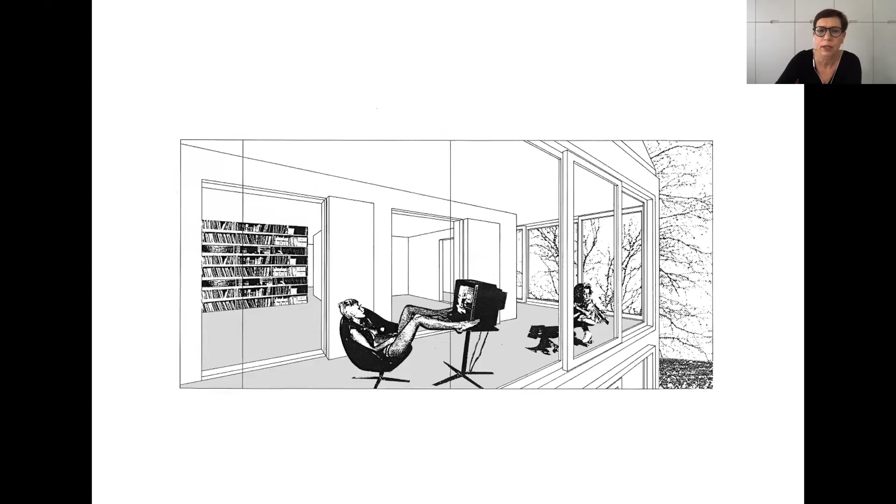This is a photograph from the exhibition, because when the house was realized, it was exhibited, it was furnished, and then it was a kind of open house for 3 months, because this construction company wanted to invite people to be interested in the house and to buy it. You can see the corridor with some people, so you can see how it can be used as a space for social interaction.

These images come from a catalog. We had an exhibition in Hamburg and another one in Paris, and we printed a catalog. What you can see here is that when we were thinking about this house, which didn't really have a plot in the competition brief, it was not only the construction firm, but also a very popular magazine involved, and it was a kind of media project in a way. These two launched the competition.

So when we were looking for an appropriate approach to this task, we were also thinking about having this house in different environments. These are very early Photoshop collages, you can see it here.

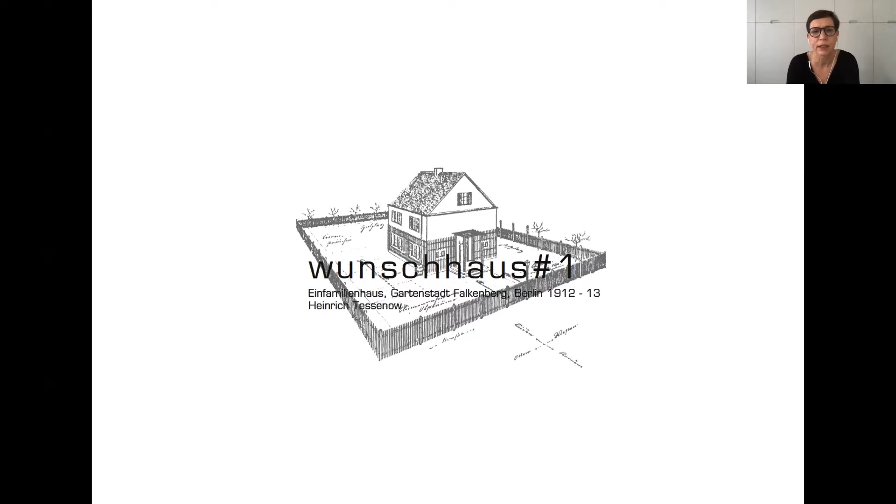And this is a reference project we were extremely interested in, because it served for us as a kind of prototype. It's the house Falkenberg by Heinrich Tessenow. Many years later, we visited the area. It's an urban development and houses by Bruno Taut, but in the middle of this modernist, beautiful modernist Siedlung from the 1920s, you will find the house by Heinrich Tessenow.

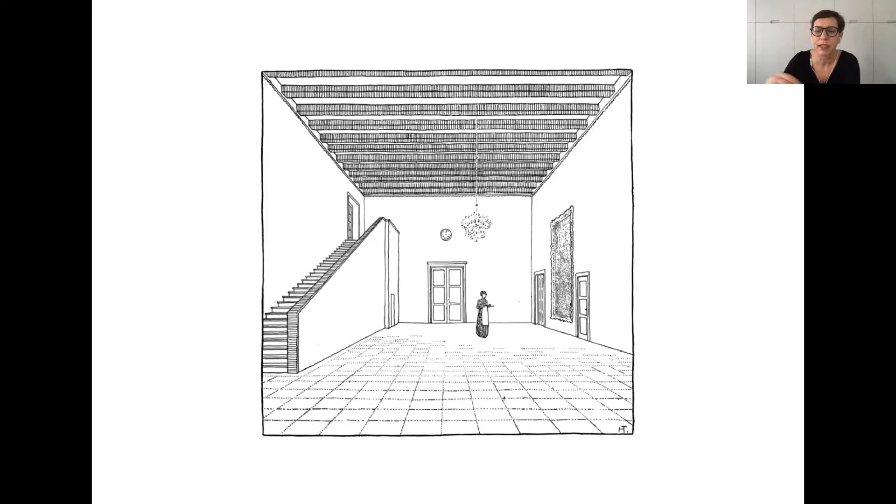And I will share some beautiful drawings with you, because I think they really talk to us about the idea of home. They are by Tessenow. I will not comment on them, but this one is interesting. I will comment on it because he was very much interested in the relationship between the interior and the exterior, and I find this drawing especially beautiful.

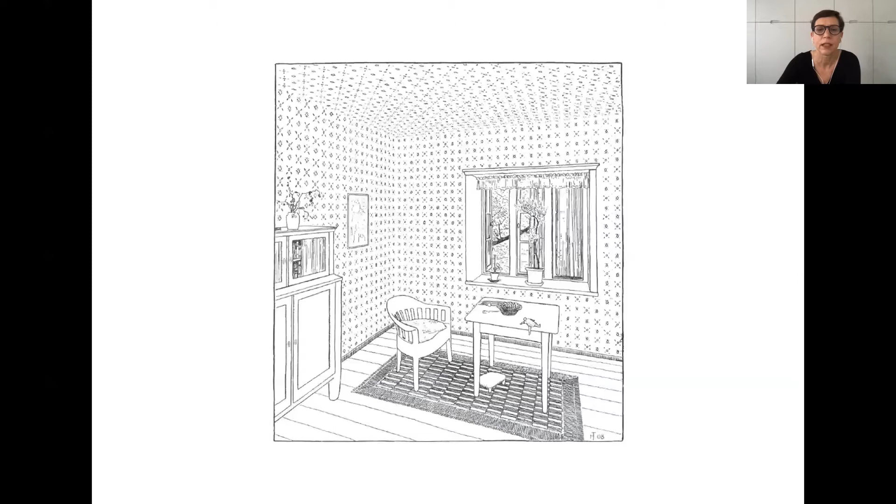And this one also. And this interior room. And he also included in this series of drawings the idea of work. And as we are all working at home at the moment, I find this an interesting image for us to think about.

Another reference was the Haus am Horn in Weimar. It was built by students under Georg Muche from the Bauhaus in Weimar, that's where I teach. This is the floor plan, and you can see that there's a kind of large living room in the center, and all the functional rooms, I would say, are positioned around this central living room. And I think it's a really interesting floor plan.

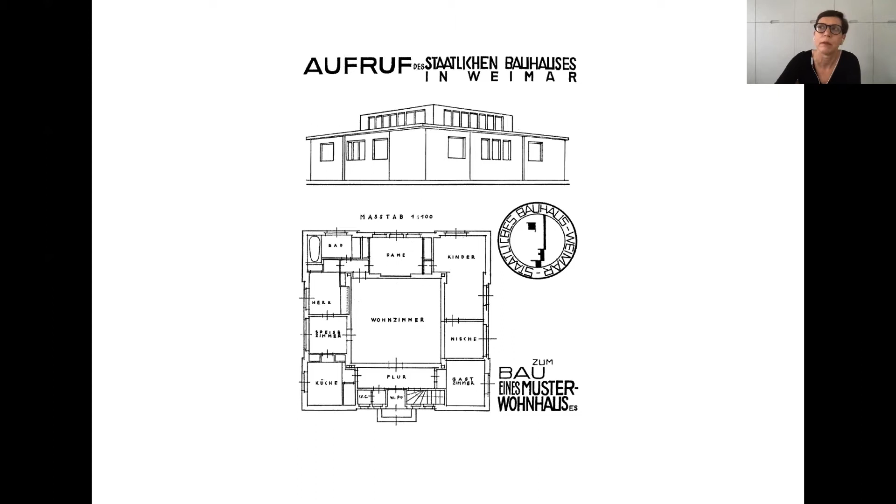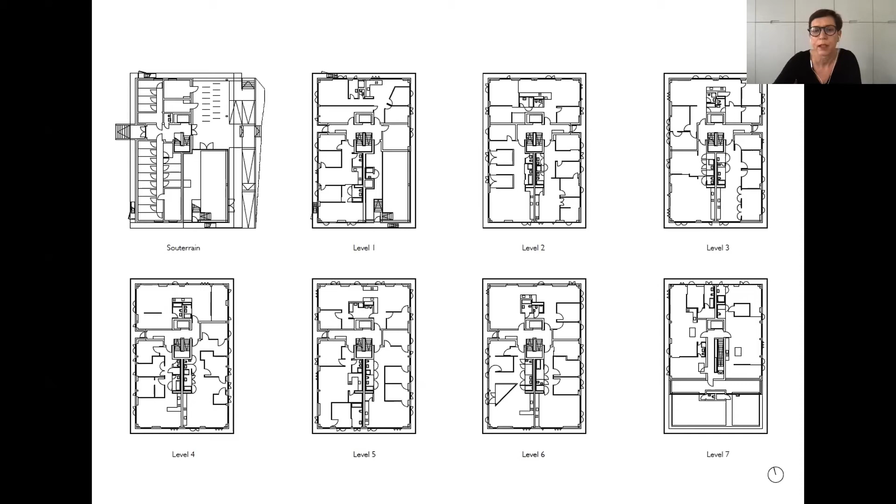This is how the building is embedded within an open plan development from the late 1950s, post-war housing development, when the density was lowered to 50% in West Berlin. This is also why the Senate of Berlin thought it could be re-densified.

But as you can see here, the building site is quite complex. There's a block building to the right, to the east, from the 1990s, when we were trying to reconstruct the historical city. To the left, you can see one of the buildings that doesn't follow the street but follows the open plan approach. Our building is somehow in between those two structures.

It used to be a circulation area, so in the zoning plan it was not meant to be a plot for building a new house. That's why the Senate of Berlin decided to have concept-based bidding for Baugruppen, and that's how we won this competition, and the group was able to purchase the plot.

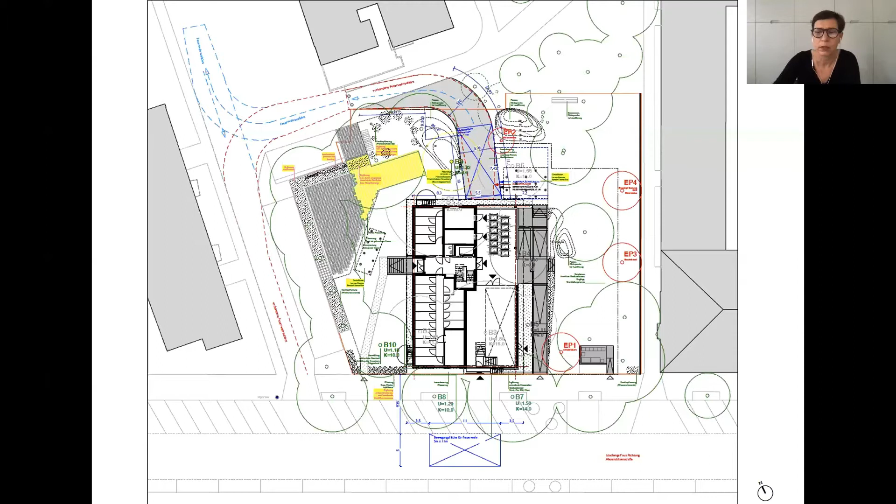I will show you some images by Andrew Alberts, a photographer who was our partner. I work with Tim Heide, and we founded our office together with Andrew Alberts in 1996, but he left in 2008 to become a photographer. We still work very closely together, and most of the images you'll see are taken by Andrew—I'll let you know when images are taken by another photographer.

I would say the concept worked with a kind of shift from nice surfaces to a certain flexibility in the floor plans, and we'll see it later.

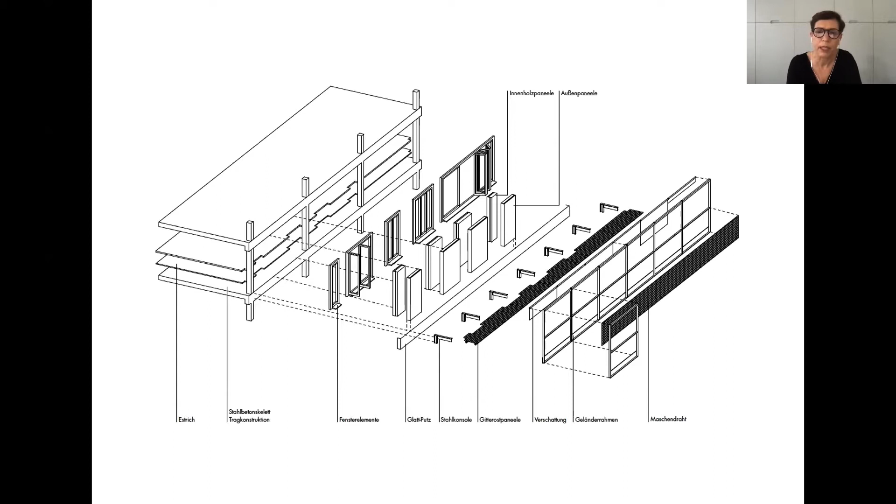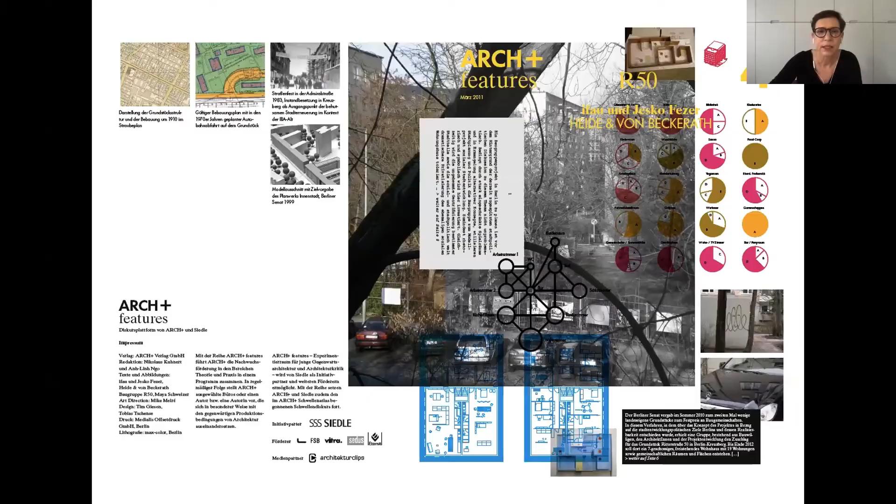And there's another topic. The project was published many times, and this publication is from 2011. So it was made during the planning process. And it's interesting because there are some diagrams I would like to share with you. For example, they were done in the beginning of the planning process, and they are based on interviews with the future residents about their needs and wishes and the relationships between rooms they have and would wish to use.

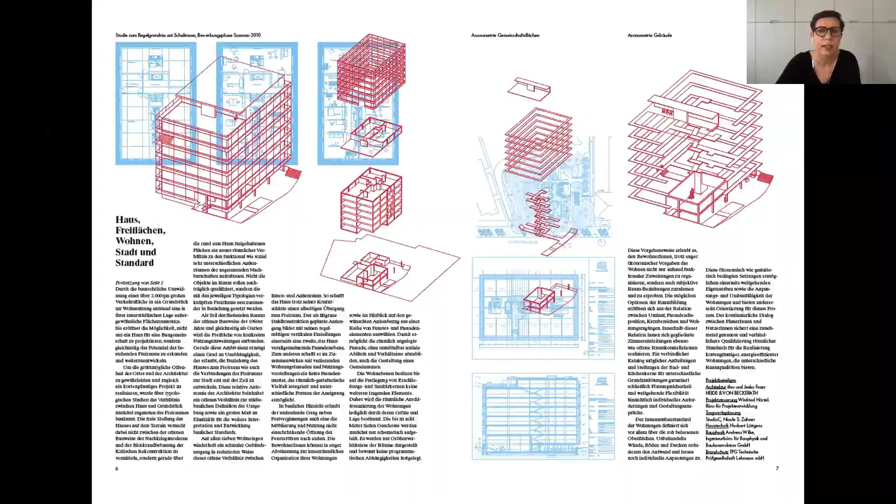And an overview over the different architectural parts of the building. And here's another series of diagrams where the idea and the location and the uses for shared spaces were discussed, and they are represented here.

So in the beginning, we as the architect provided the floor plans with shared spaces on each level. So the idea was that, for example, three apartments would have a shared library or a shared room for their children, and so on. During the discussion with the group, it came out that the best solution would be to have one larger community space, the one that you saw already, and that all the different functions they wished to have would somehow be embedded into the program of this community space.

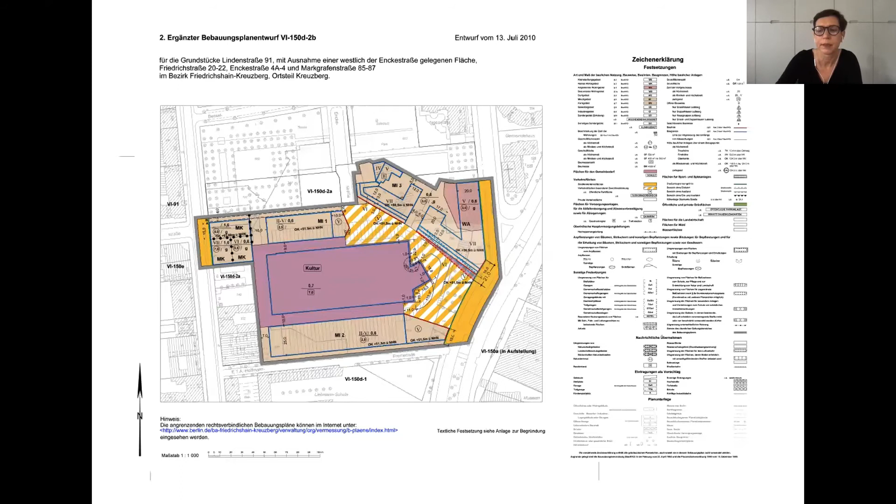Our approach was to have a kind of mix of different users, of owners, people who rent, but also a little bit of commercial space, a social association, local initiatives and services, and creative enterprises.

We developed this volume for the plot, which is somehow the maximum volume. And we knew that the whole design process, and all the discussions we would have, would be related to density, because if you develop a building like this with a width of 23 meters, you have to think about how people live together in such a dense environment.

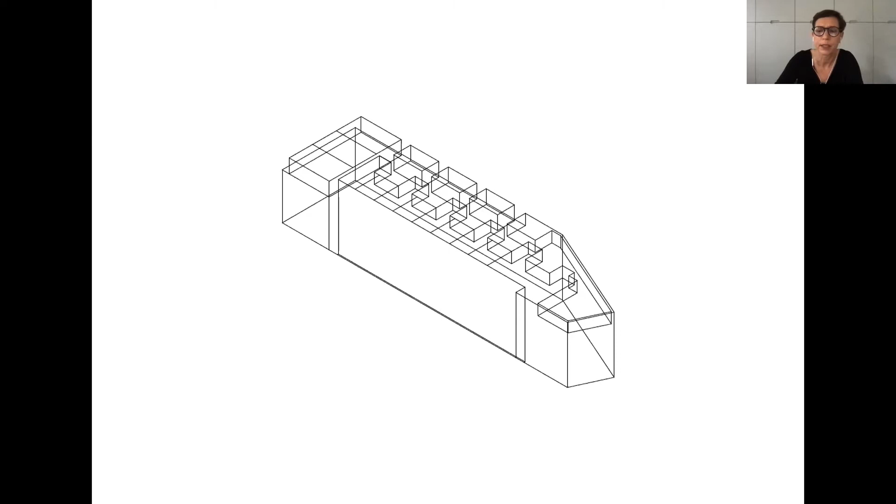What we then did is we tried to have a very economic circulation system. This is based on 2 vertical cores and several streets outside of the building, but also inside of the building. You will find 2 linear circulation streets on the ground floor outside of the building, then one in the middle of the building in the interior, and another one on the roof.

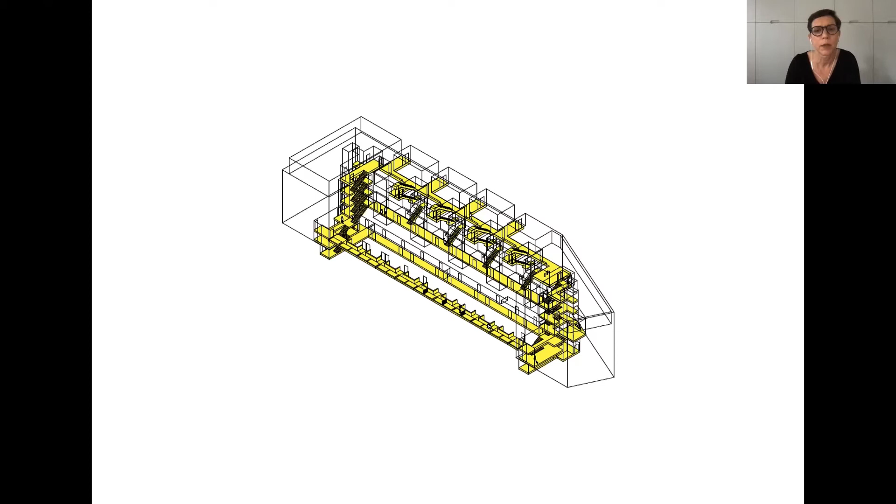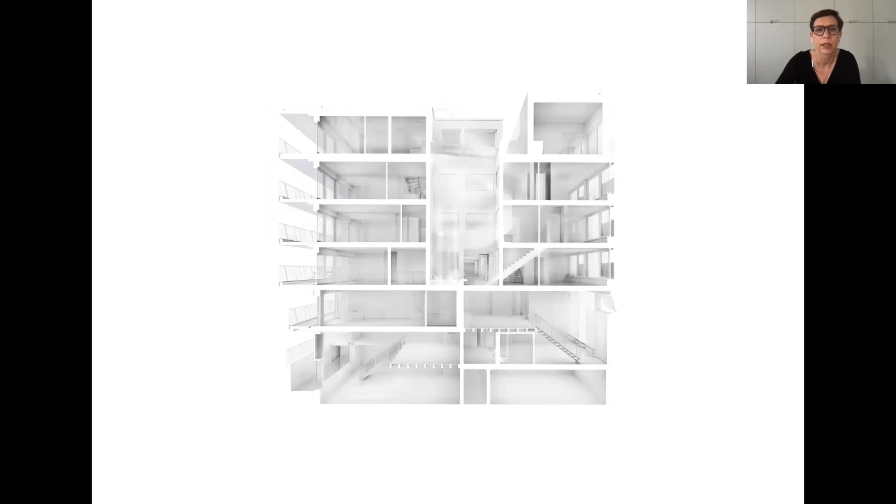This approach to circulation allowed for many different kinds of apartments and studio space, and I will click through this series quickly. It's only to give you an idea of smaller, larger, duplex, and so on, kinds of units.

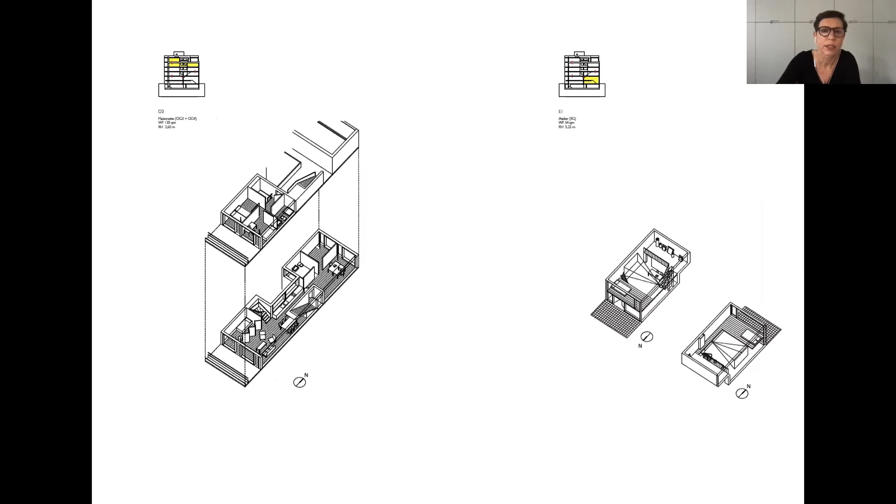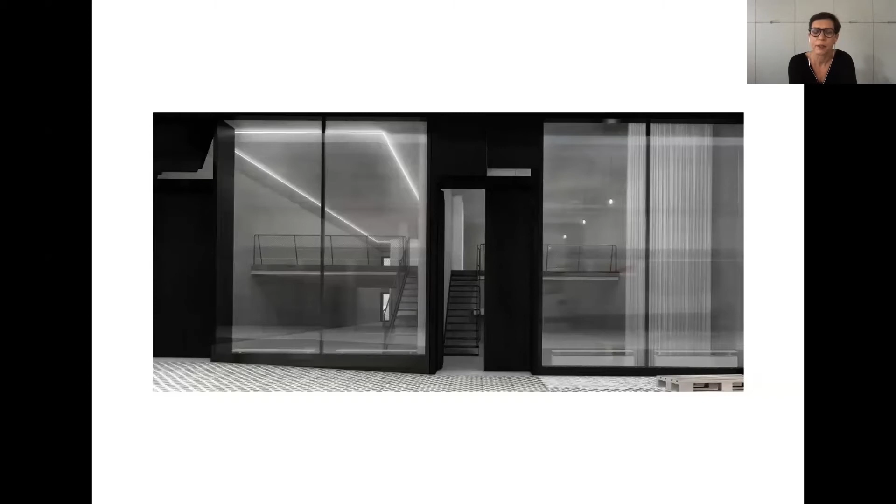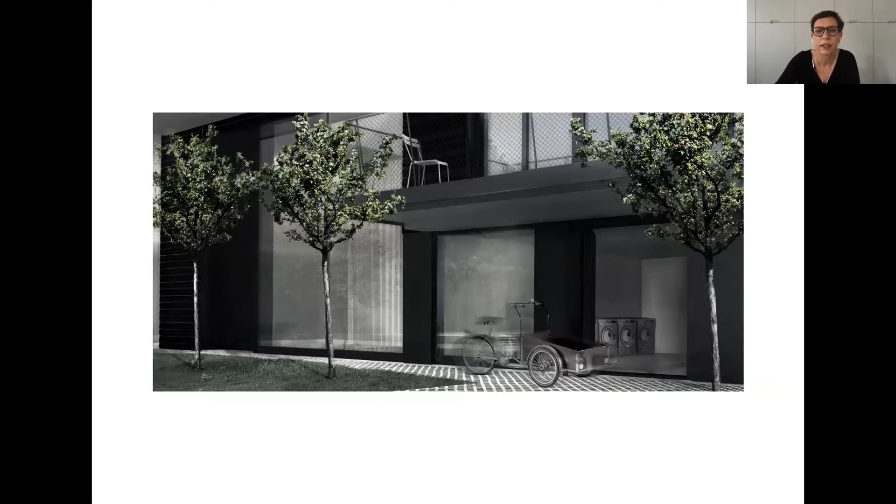One of the problems with a large group, there are almost 90 units in this building, was how to communicate the architectural agenda to such a large group. At one point we realized that classical visualizations of the whole building would not serve us to understand what this huge building would look like, because we were much more interested in the details of openings and galleries and railings.

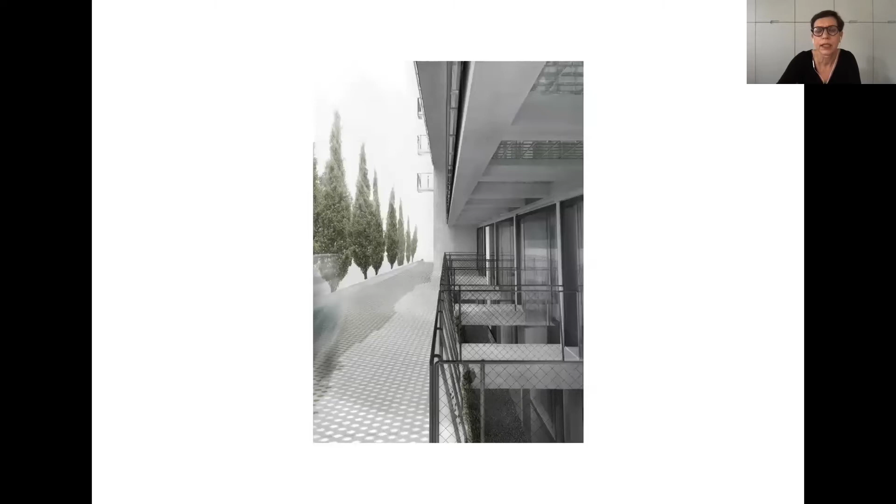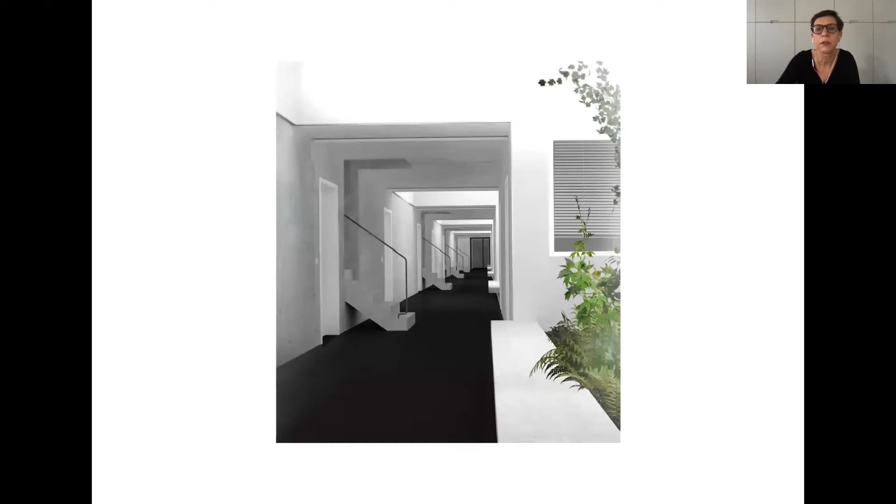I will guide you through this series of sketch-like images that are focused on certain spatial details. This is the entrance hall. This is the access road to the south, where you have little bridges to the double height studio spaces in the souterrain, and the gallery above with glass bricks, and the rue intérieure with the green courtyards. This is how we imagine the courtyards to be.

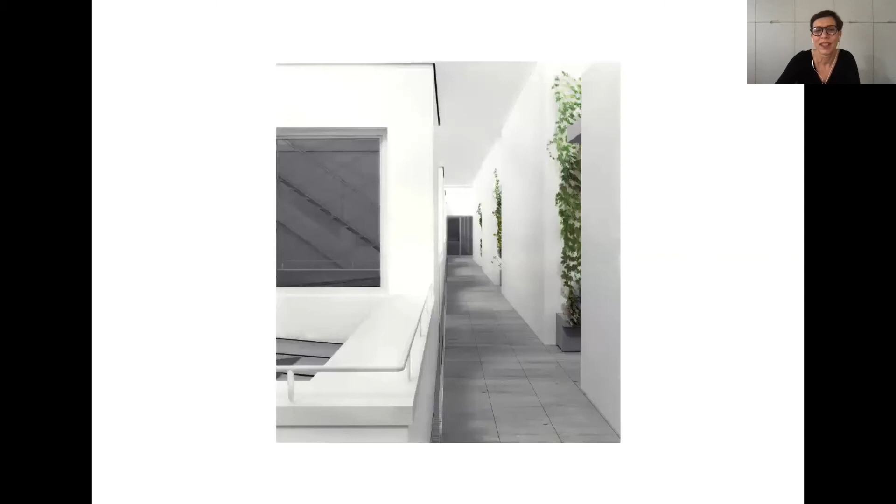The street on the roof, a roof garden. And I will now, as Djordje asked me to, show you some floor plans. I will guide you through the building via the floor plans, starting with the roof plan.

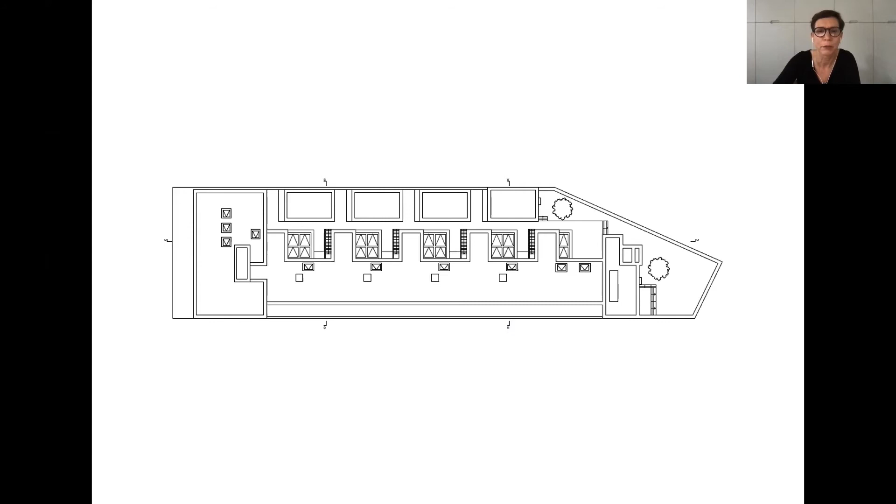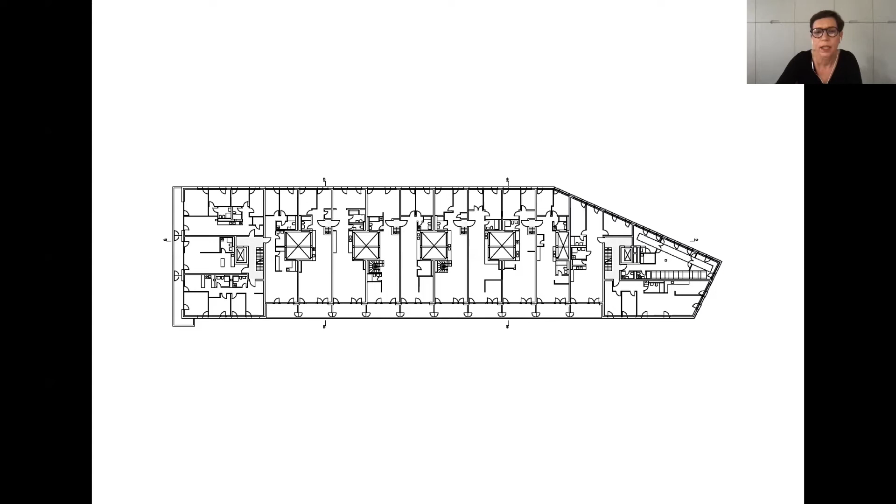This is the level under the roof. Here you can see how the larger apartments go through the building from north to south, and they are accessed from the roof.

Another level where apartments go through the building, accessed from the rue intérieure. This is an image where you might understand the depths of these apartments. They get light from the courtyard in the middle, and in most cases that's where the kitchen is.

It's quite interesting that people in the kitchen, cooking, might have a kind of visual chat with another party on the other side of the courtyard, where there's also a kitchen. So there are small neighborhoods arranged around the courtyards.

Another image that shows the relationship between the courtyard and the apartment. This is the level with the rue intérieure, which looks like this at the moment.

This is an apartment to the north, where there's a smaller studio apartment connected to the long apartment on the next level, and a window to the north facing the flower market hall.

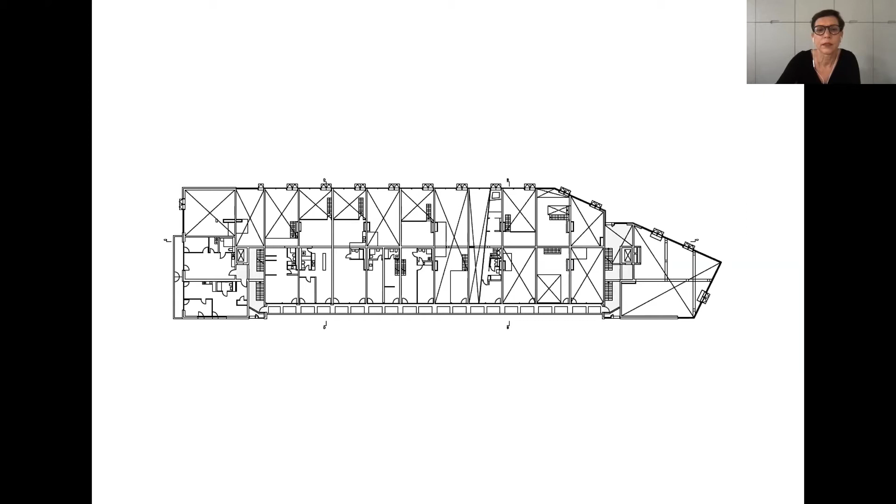Here's a couple that uses two studio spaces and lives in the middle of the deep building, and here's the desk that opens to the gallery.

Another studio on the ground floor. The studios are double height, about 5 meters high, and we developed a kind of kit for how to build the studio in the interior.

So there's always a gallery and stairs, but it was designed together with the users of the studios — not designed by them, but organized together with them. The design itself is done by the architects.

The same studio on the gallery. And this is another studio facing the flower market hall, also a double-height studio that opens to the public space of the square.

One of the studios is run by a woman who has a restaurant, but she's also working with ceramics, as you can see. She's from Korea. It's a very nice restaurant.

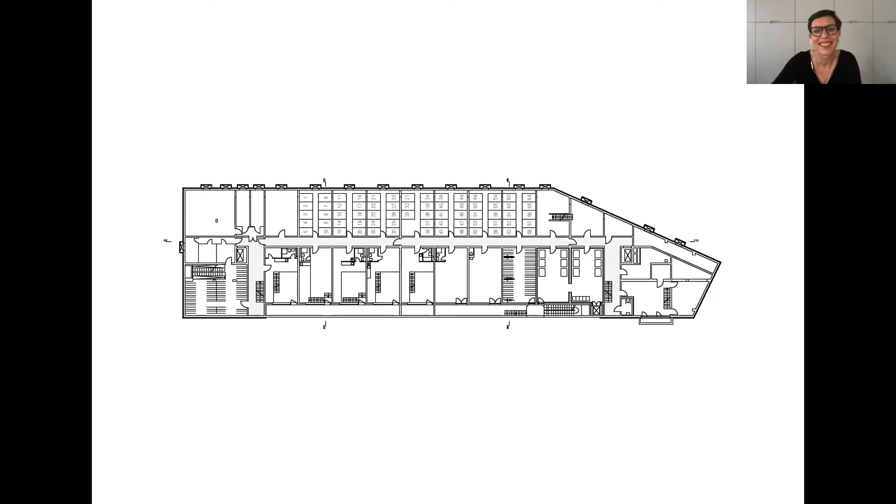And the basement. As you know already, we are interested in lowering the ground floor into the basement, or using space that is lowered, like the souterrain entrance at R50. Here we tried to have studio space in the basement on the southern side.

This is an image I really like, because you can see the public space, the street to the south, seen to the right, and then there's this lowered space between the studios and this wall.

I will also guide you around the building. This is how it looks from the Lindenstraße, and there's also a school next to it. This is seen from the south.

If you move a little closer, you can see something I find very interesting, that the balconies are furnished in a very similar way. So it's somehow less about individual representation of individual lifestyles, but I think this image tells something about how the community is growing.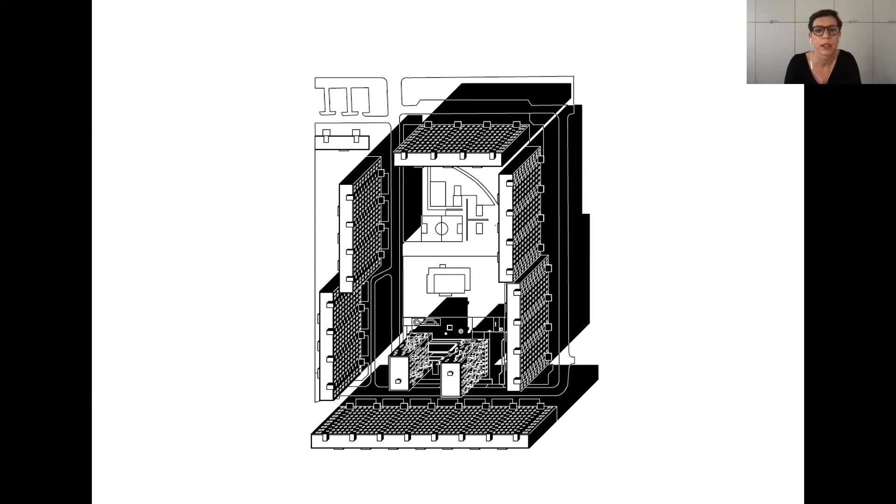And the question is, can the densification of these large housing blocks contribute to the quality of the lives of the people who live there? We think yes, but we also had to develop a strategy for ourselves.

These are some details of the ground floors of the existing housing blocks. You can see that there's no relationship between ground floor users and public space. This is why one of our approaches to this task - this was a competition we had won in 2015, that's Heide von Beckerath, it's our office - was how to contribute to the public space in the inner courtyard of this block.

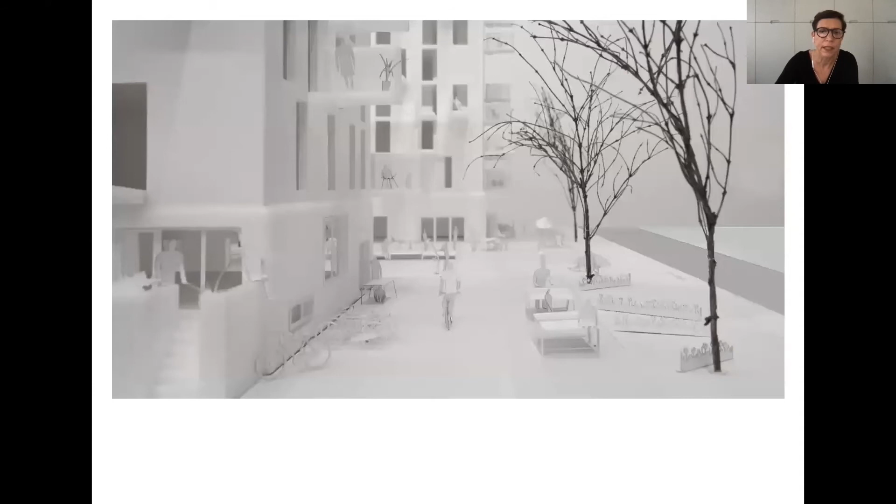And we built models and we tested them during the day and at night.

Another approach was to the floor plans. We thought that if we don't know the residents, because this is rented housing, and part of it is subsidized, so people might get an apartment without having chosen the area of the city, the architecture of the building, and so on. So we have been working on floor plans that are open enough to allow for bedroom, living room, and so on, but on the other hand also encourage people to use their space in a different way, to work at home or to live in a kind of community instead of a core family. That's a topic we are extremely interested in.

And now I'm showing you a series of typical floor plans, and you will see that what's always the same is that the core is in the center of the apartment, and the apartment somehow rotates around the core. Just to give you an idea how we...

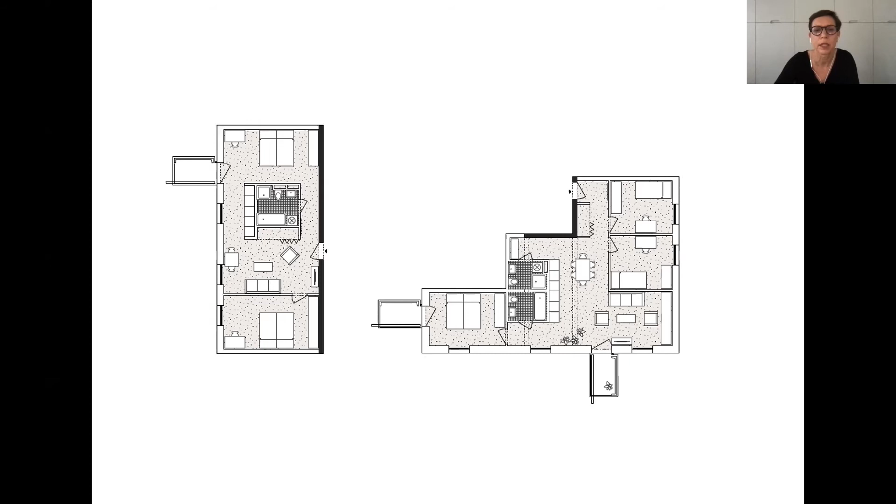argued our approach to a little bit different way of living, which is an argument you really have to discuss with a housing association that is meant to deliver housing. But they became interested in this approach, and you can also see that there's sometimes one balcony, sometimes two. They are individual balconies.

And on the ground floor, this is the floor plan to the right, we have provided cluster apartments with individual entrances to each room.

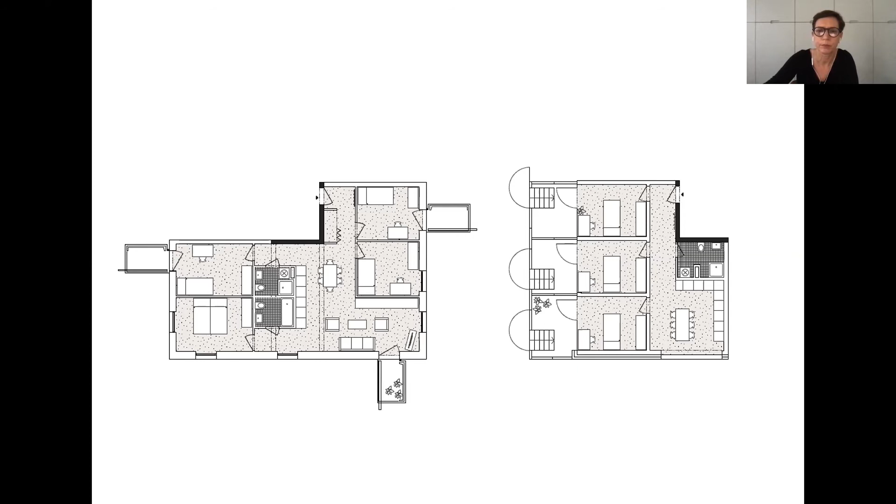This is to give you an idea of the rotation within the apartments. And this is one of the rooms with the individual entrance.

And these are photographs which have been taken, I think, 1 or 2 months ago, in May or June maybe. And finally the open space is finished. It has taken 1 more year to finish. We had many problems to finish the open space, which is such an important part of our work, not only here, but especially with this project, because we were commissioned with the open space as well.

You can see it's about 2 tower-like houses, and they are connected via a kind of passage that connects the 2 entrances. And I will guide you a little bit. We have used full concrete bricks.

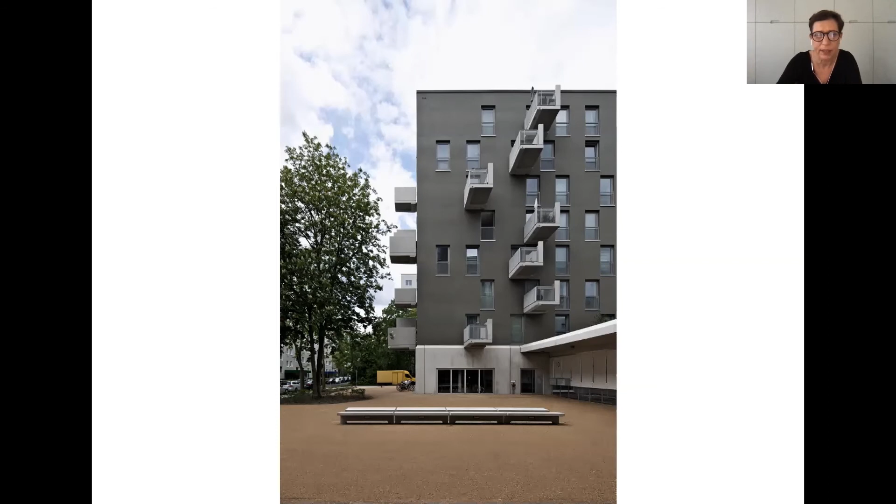The space you can see at the end of the courtyard is a bicycle storage space that also has water, so you can use it for collective uses as well if you take out the bicycles. Because the community space was not part of the program, we had to be a little bit tricky about it.

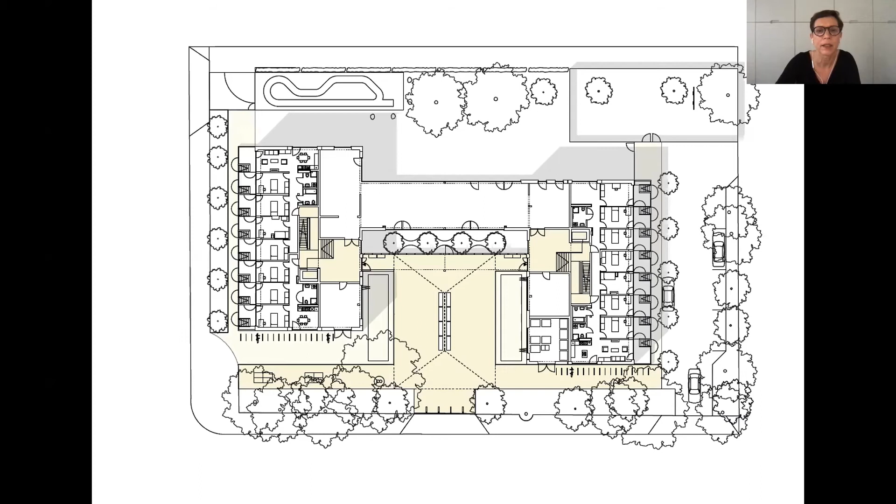This is the ground floor plan with the cluster apartments, the entrances and foyers, and so on. There's a kindergarten behind the passage. This gives you an idea of the foyer.

And the regular floor plans, I'm showing two, and you can see how the balconies rotate around the building. Here are finally some glimpses of life. The balconies are used now.

And yeah, that's it. Okay, I come to present to you the last project. This will be quite short. It's a co-housing project again, but not in Berlin, but in Bavaria, in a smaller city called Fürth.

It's next to Nuremberg. The idea is to develop an approach to a gallery space, kind of street in the sky, that allows for circulation on one hand and access to the apartments, but on the other hand allows for some privacy within the same space.

I'm showing you here a gallery space from a high-rise building in Berlin, social housing from the 1960s. This is what people usually imagine when they think about galleries.

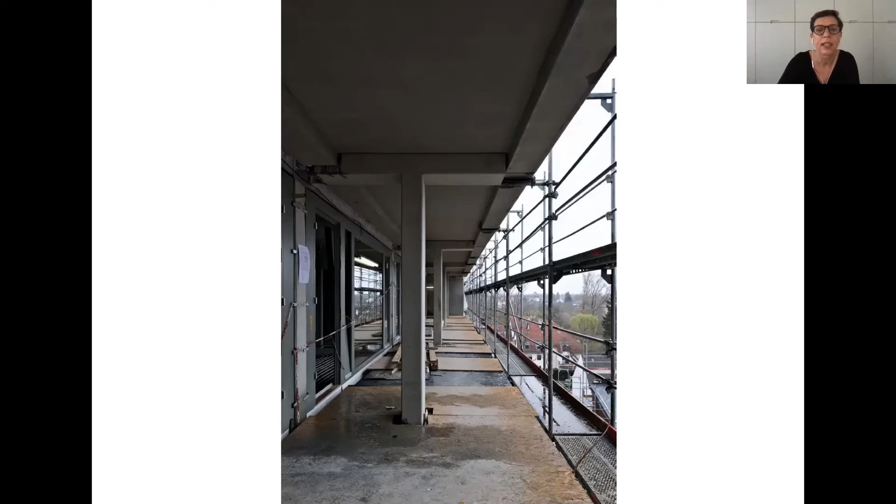And that's something we want to consider and also to change and discuss with this building. So you can see that the gallery is larger and wider, and it is also divided into two sides somehow.

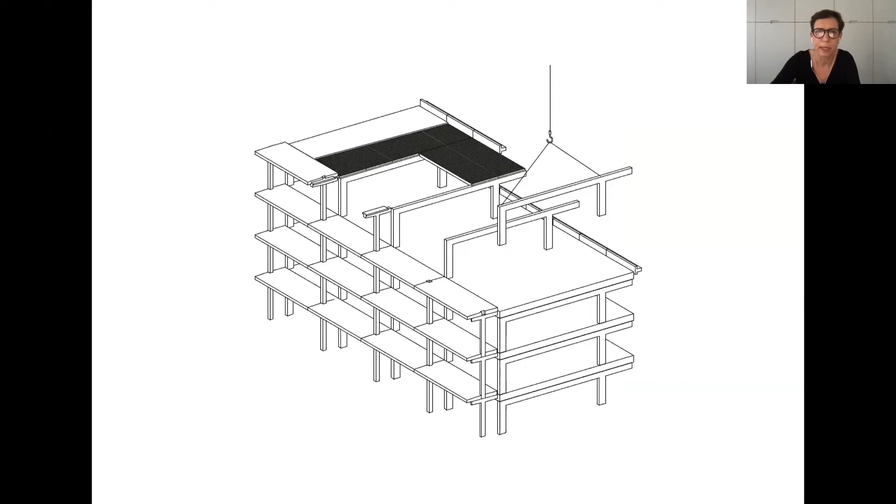The construction of this building is a kind of mix between a skeleton and a building made from walls. We have developed a frame system, and then you have a kind of T-like column that serves for the gallery space. This is how the building looks like at the moment.

It doesn't look like a housing project. That's really interesting because there are no divisions at the moment, and all divisions are made from light constructions, or will be made from light constructions.

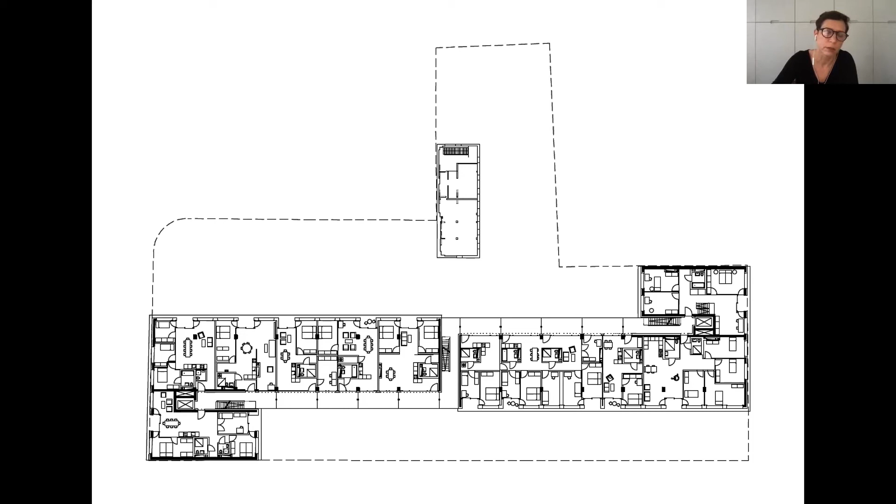And on the opposite side, every apartment has either another small individual balcony or a large flower window. So there's also some individual open space.

This is the construction site. In the middle of the site is an old building, a former workshop building, and the community will use it for workshop and community space and so on. And this is the other side.

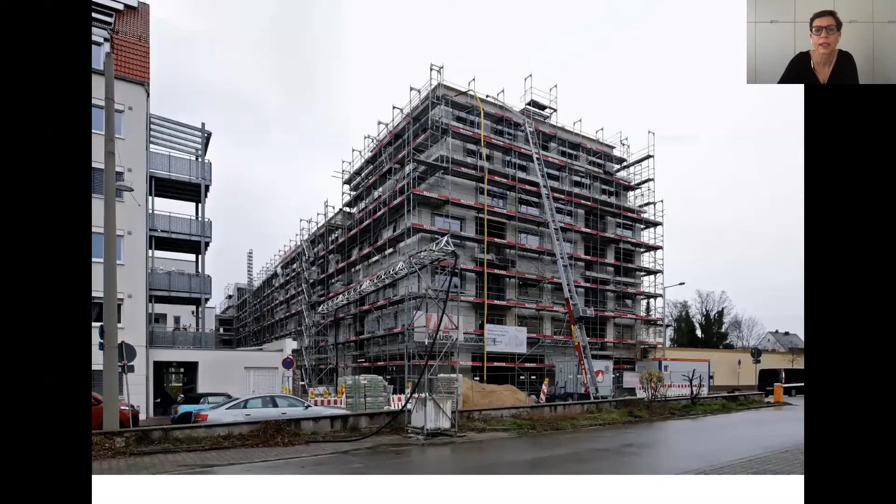What you can see here is that the plot is very interesting. It's between two streets, but one of the streets, Dr.-Mack-Straße, is lowered by about 4 meters. So the challenge was how to include this step, or this one level, into the whole approach to the design of the building.

The community, or the Baugruppe, is also a cooperative, and other parts are in ownership. So the background is a little bit similar to the IBeB.

The group was interested, together with us, to have a public alley through the building, because they feel they would like to contribute to the urban context and to be very inclusive, to include all kinds of families and people from different backgrounds, but also to allow the public to somehow participate in the life of the building and the activities within and outside of it.

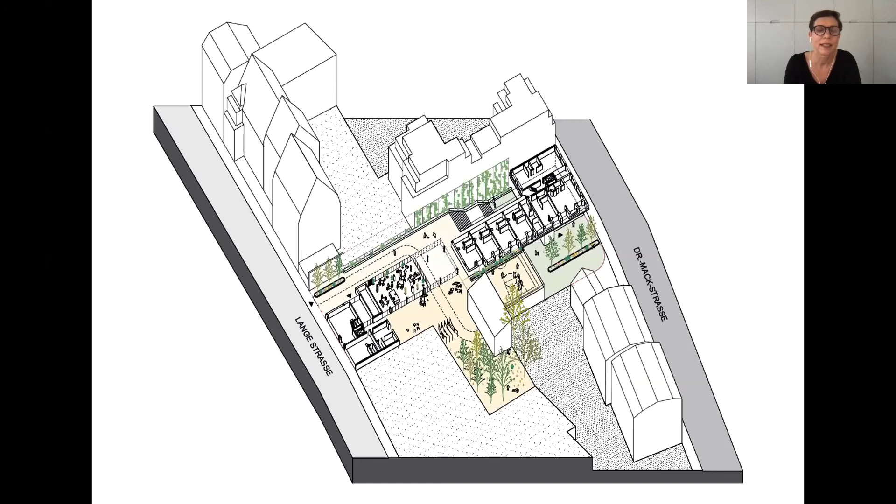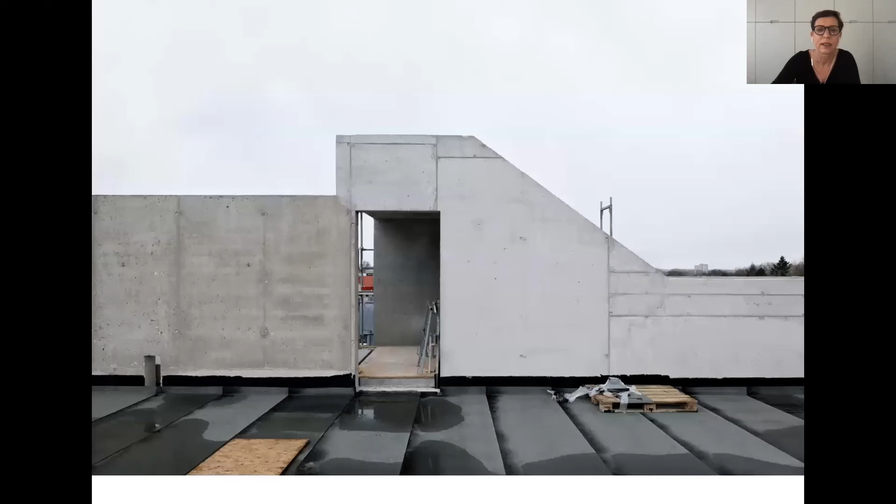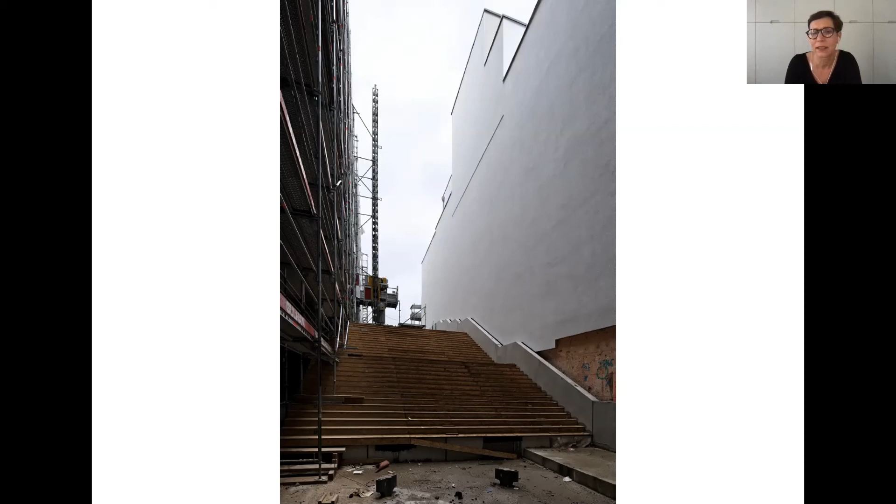Another detail of the construction site. This is my last image. It's the promise of the whole project, this theater-like staircase, a public staircase that is part of this co-housing project. Thank you very much.